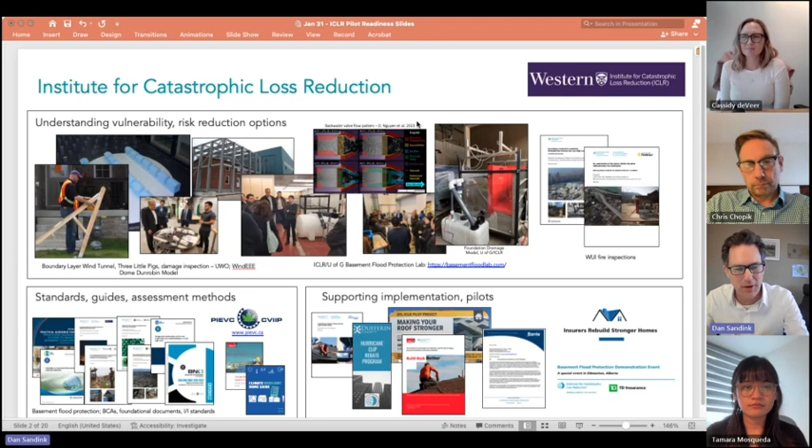So we are largely funded by the P&C insurance industry. What we found from our insurance membership, which represents about 90% of the market in Canada, is that when we have catastrophe events, the majority of losses tend to be accrued to property insurance—that's basically residential buildings, contents, living expenses, and so on. The remainder for the P&C industry is broken out into commercial and auto, but by and large, insurers have come to us with questions about reducing risk for residential properties. That's been their primary concern.

One issue is they tend not to be engineered, and of course older properties are more vulnerable in many ways. But what we see is typically 60% plus of catastrophe losses—when we see these big catastrophe events, 60% of those losses are to residential properties.

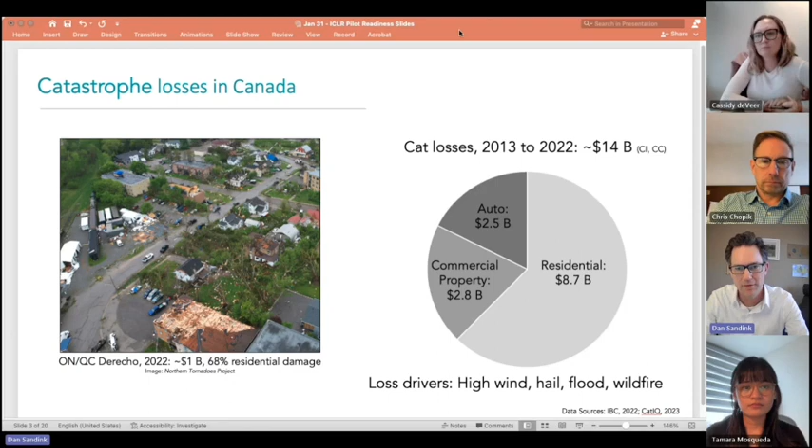So the rest of my presentation, I'm going to talk about what Frank Lohman has advised us to start a discussion with the building members of the task force, and that is on readiness for conducting pilots in these areas—generating some background information so that we can get to a state where we can conduct pilots and generate useful results from those pilots.

First thing I want to mention is that we're not starting from zero. There are many, largely municipalities in Canada, that have been implementing resilience. The first point here is that several municipalities have implemented incentive programs. We've worked with Dufferin County in Ontario, and also with the City of Calgary throughout 2020 to 2022 on an incentive program for roof cover, for impact-resistant roof cover.

For several decades now, there's been several dozen communities in Canada that have incented basement flood protection, generally oriented toward existing buildings, but the Dufferin and Calgary programs both included existing and new construction.

Some elements that we'll talk about with the task force over the coming months are already technically covered in codes, but because of different interpretations locally, they're not applied. One example is the NPC 2.4.6.4 wording for sewer backflow protection, relating to backwater valve installation for sewer related flooding. Some jurisdictions interpret this wording to require backwater valves, others don't. So we are applying these measures in some cases, just not universally across the country.

City of Barrie, we worked with them after the 2021 tornado to develop a set of code change requests for Ontario and national codes. Those are still working through the process, but it's another example of working with the building department to identify what we can do to reduce risk.

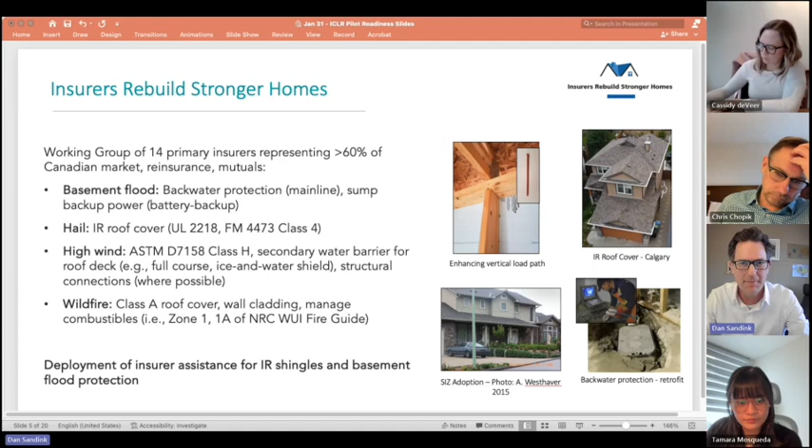Over the past couple of years, insurers have developed products or different approaches, largely focused on hail protection in the Calgary area and also basement flood protection across Canada. So that gives us some more practical work to draw on.

So which I'll go through. I know there's a lot of content here. I'll try to go through it relatively quickly. We can talk about it over the year. We can talk about anything here for like a whole day. It would be fun for me.

What we'll talk about right now is pilot readiness factors across our 4 key perils. For ICLR, the most important drivers of loss we've seen so far in Canada are hail, high winds, wildfire, and basement flood. We've worked on developing standards and guides with CSA, with Standards Council, with BNQ, with different groups across Canada on all of those topics.

We're at a different stage with respect to final technical recommendations across these different perils. I've got a set of factors here to help categorize which areas we could probably work on more quickly than others. First is, do we understand vulnerability of buildings? Second, do we understand the protection options available? Third, is the technical guidance mature? Are we working with standards that have gone through multiple iterations, or general guidelines issued by nonprofits? The more developed the standards, the more ready we are for implementation, we think.

Fourth factor is, what degree of risk is assumed by the builder to implement these measures? Some measures have been applied for many years in Canada, and are probably lower risk.

Some measures are a bit more novel and might present some risk to builders. The other question is, what can we do on the private property side, within the building footprint and within the homeowner's own property, to mitigate risk. Some measures for hail and wind relate entirely to the buildings. For flood and wildfire, there are considerations off the private property that have to be addressed for full resilience. We'll talk a bit about that as well.

The next consideration is maintenance requirements. Once you install those measures, do homeowners have to maintain them? And finally, hazard assessment: do we know where in Canada, where in communities, we should apply these measures? One last category is complexity and cost for installation. Is it going to be expensive? Do we have to train tradespeople to be able to install these measures?

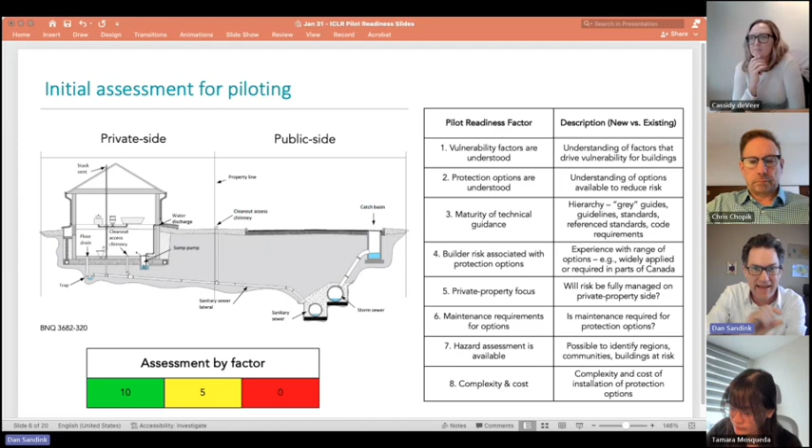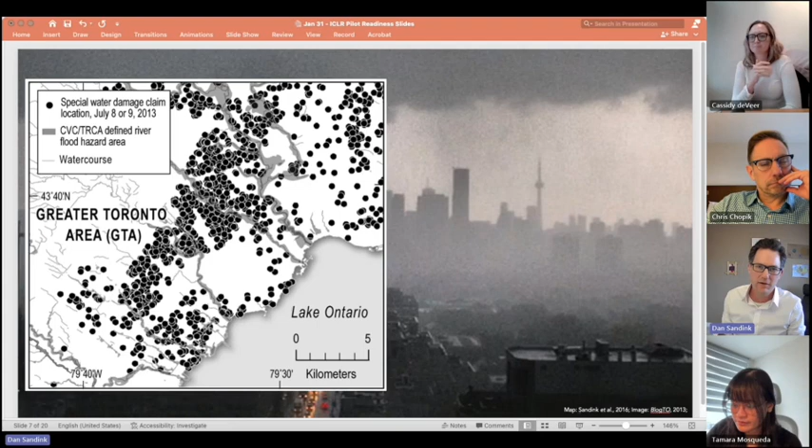First, urban flood. When we talk about flooding for ICLR, we tend to focus on urban pluvial flood. This is a kind of flooding that occurs off defined river floodplain areas, and it's also not coastal flooding. It's extreme rainfall that overwhelms storm sewer systems and sanitary sewer systems, causing flooding. Basically, anywhere the rain falls, buildings could potentially flood from pluvial flood.

So what do we do to mitigate risk? Generally, we apply drainage factors and backwater protection. We apply good practices for foundation drainage systems and sump pump systems. This is all outlined in several new standards that we're involved in developing. Most of these practices are fairly well applied for new construction.

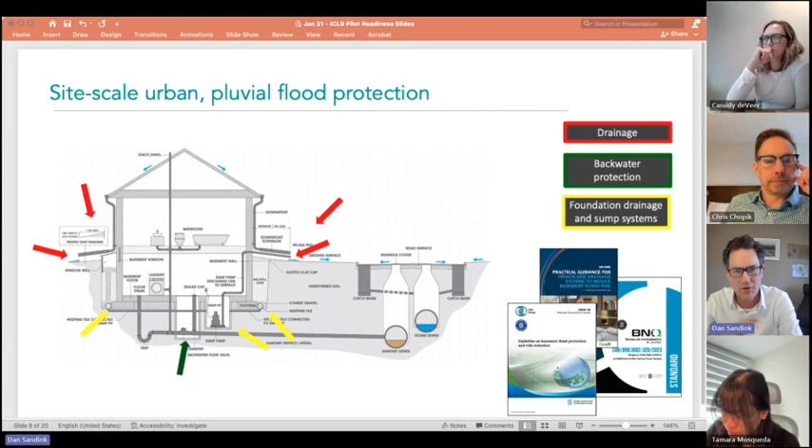For example, I'm sure you're doing good lot grading practices. Most municipalities have lot grading and drainage bylaws that would apply, but there's still a bit more we can do to protect new homes, and a lot we can do to protect existing homes. Going through my criteria, I won't detail everything, but generally we think we're in pretty good shape to conduct pilots in this area.

One reason is that most of the measures are fairly well developed and applied across Canada. As I mentioned, we're talking about lot grading and drainage, sewer backflow protection, and backup power for sump pumps. Although the standards are relatively new — there are new standards we worked on, like CSA Z800 — most urban municipalities have been dealing with this problem for many years and have issued their own guidelines on this topic. So we think we're pretty mature with respect to the technical guidelines.

I think the biggest concern for basement flood, for somebody working on a specific home, is that you can do so much on the private property side, but there are still municipal-side factors that need to be considered for full resilience. The other thing is that for existing construction, it can get pretty complex — you're dealing with digging up floors, regrading lots, and so on. These are the drawbacks to basement flood protection. But by and large, we've got many examples where we've done this already in Canada.

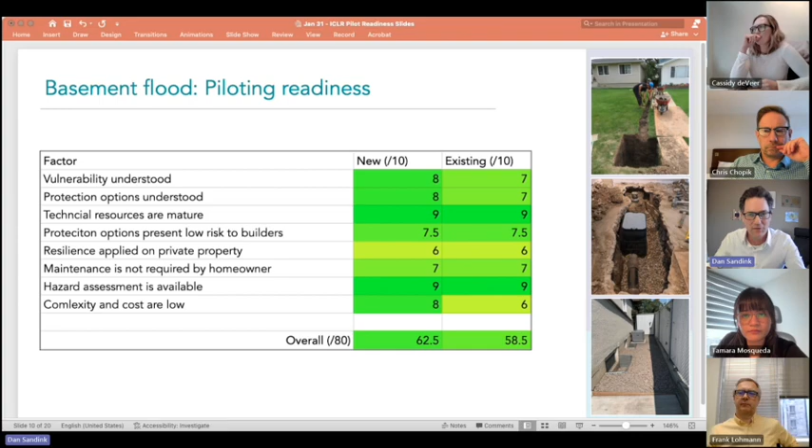Next, wildfires. I'm sure you're familiar with the issues around wildfire. Really quickly, one of the things we've done at ICLR over the past few years is post-fire community inspections.

We worked with researchers on assessing ignitions in Lytton after the fire in 2021. That report is published, but one of their main recommendations was that the fire moved through the community extremely quickly, fast enough that structural firefighting wouldn't really have made much difference. So we need to apply passive measures on properties within communities to reduce risk.

I'm sure you're familiar, but I'd say we could categorize these protection measures for properties into two categories: building measures and fuel management. Building measures essentially mean selection of cladding materials, roof cover, etc. that's not vulnerable to ignition. Fuel management means making sure fire isn't approaching the building, that we're not storing debris or having juniper bushes that could ignite from embers and so on.

This is something that's been going on in BC for many years, and many communities have DPA arrangements for this type of protection, but it's not widely applied in Canada.

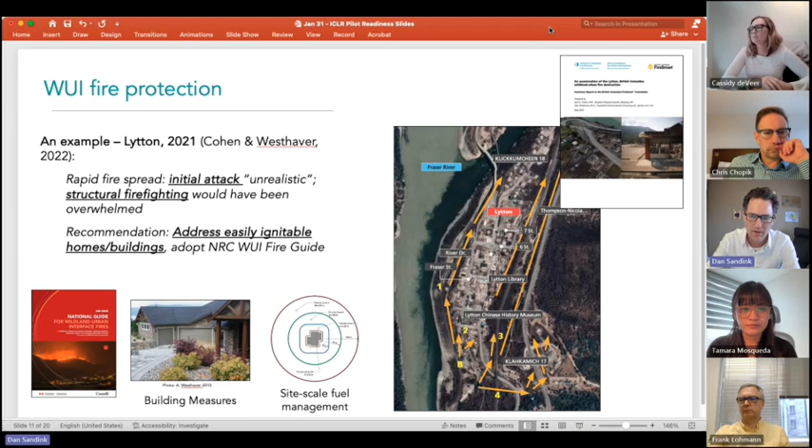For example, roof construction and roof cover really drive vulnerability of buildings. The structure ignition zone is also a very important factor driving vulnerability. Decks and windows are also very important. All of these elements matter, but some drive more vulnerability than others.

So from a pilot perspective, if we're looking to apply readily accessible, low-cost measures, our argument is that we could focus on some of these key areas first, and then move on to other elements as money and interest become available.

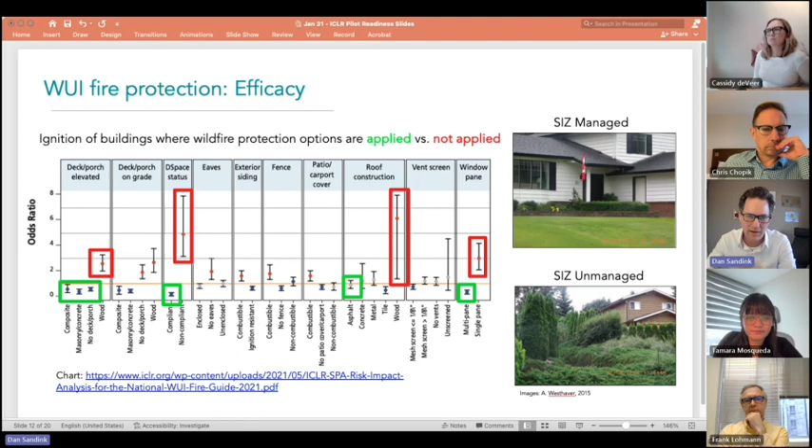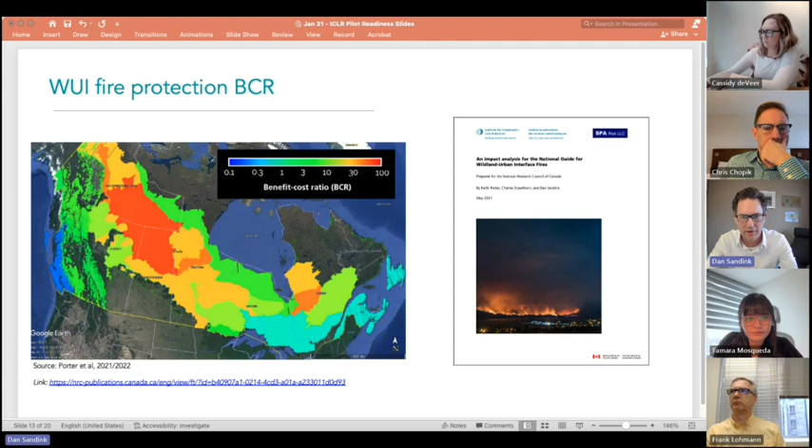Also for wildfire, ICLR conducted a benefit-cost assessment a few years ago for the NRC wildfire guide. This gives us a good indication of where in Canada we'd see a return on investment for fire protection. So relative to other hazards, we're fairly well set up to identify at least the general areas in Canada that would benefit from applying wildfire protection.

Just a footnote, Cassidy, understanding that's a dynamic situation. With respect to readiness for piloting, wildfire is a bit trickier than other hazards because there's a community-level consideration. Structure ignition zones extend beyond properties, and fire suppression has a role when fire is actually coming through an area. But we can still make a difference on the property side.

The major concerns are that maintenance is required by homeowners, so we have to engage homeowners and communities on ongoing maintenance programs, and sometimes you have to get communities together to manage structure ignition zones. Other areas we're okay, though not as well set up as for other hazards. Ignition vulnerability of buildings is still an area of active research, but we can learn a lot from pilots at this stage.

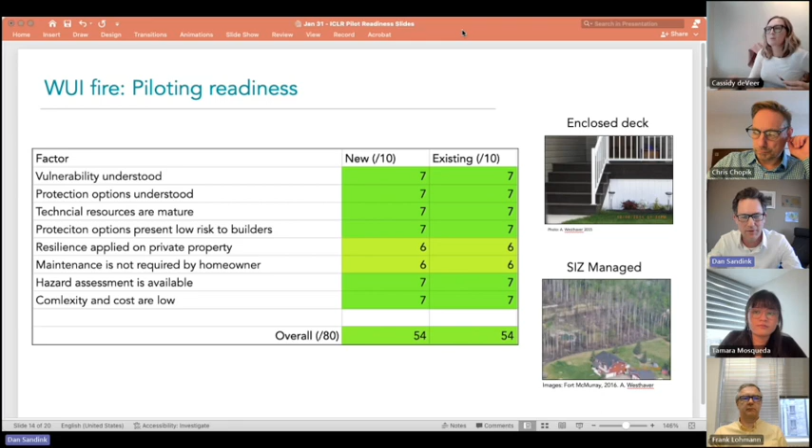Moving on quickly to high wind, I'm going to cover high wind and then hail very quickly, and then wrap it up with the overall summary.

For high wind, we've had a long-running program in Canada, including the work with Western University. We're one of the best countries in the world when it comes to understanding vulnerability of low-rise buildings to high wind impacts. So we can likely make good recommendations and good pilot applications of measures that address the key drivers of risk in Canada.

What you see in the news, or from many commentators, is buildings completely destroyed by tornadoes, hurricanes, and so on. But when you actually look at damage that occurs during high wind events, most of it is actually relatively minor damage—roof cover loss, fascia, siding, downspouts, etc. That's because the wind field has different speeds throughout; right up close to the tornado itself, wind speeds are high.

That's where you get those total devastating damages to buildings. But most buildings are affected by the periphery of the tornado track, and that means roof cover and related damages. So we know how to prevent those or how to reduce risk to those types of damage. It's not terribly technically complex.

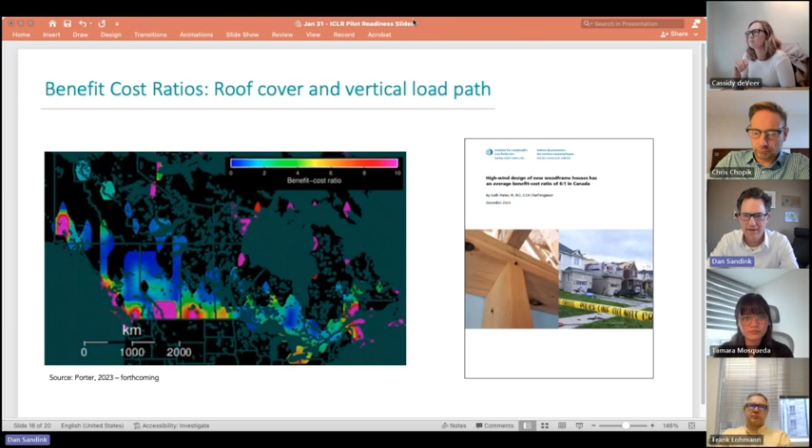We also have a benefit cost assessment for high wind protection. Largely, southern parts of Canada would benefit from application of these measures. We're happy to go into detail about that anytime with the task force.

So the overall readiness across most of the categories, we're in really good shape. We have good understanding of vulnerability, good understanding of what we can do to reduce vulnerability. We have standards. The standards are relatively new, but they're available right now. They haven't gone through multiple iterations. That would be the only caveat.

Protection options, they're all passive. We're talking about more connections, selecting different roof cover, 6 nails instead of 4 for shingles, etc. So not anything that requires maintenance or that would potentially result in significant risk to a builder from our perspective anyway. Hazard assessment is largely available.

The one area that might make piloting difficult for existing construction is the structural connections and the structural resistance to high wind, which is very difficult in existing construction, but pretty straightforward in new construction.

And then finally, hail. Hail largely affects, in terms of damages, southern Alberta. We also have a benefit cost assessment conducted for hail impact resistant roof cover. This is UL 2218 class 4 impact resistant roof cover. The additional cost maybe $2,000 to $2,500 per home in the Calgary area, but it would pay for itself in about 5 years due to reduced annual damages.

We know that most of the damage in hail events is caused to roofs as opposed to other building components. Very severe events can damage siding and so on, but most damage is caused to roofs. And then we know also that there is impact-resistant roof cover available on the market. Most of the major suppliers have it on hand, especially in Calgary now.

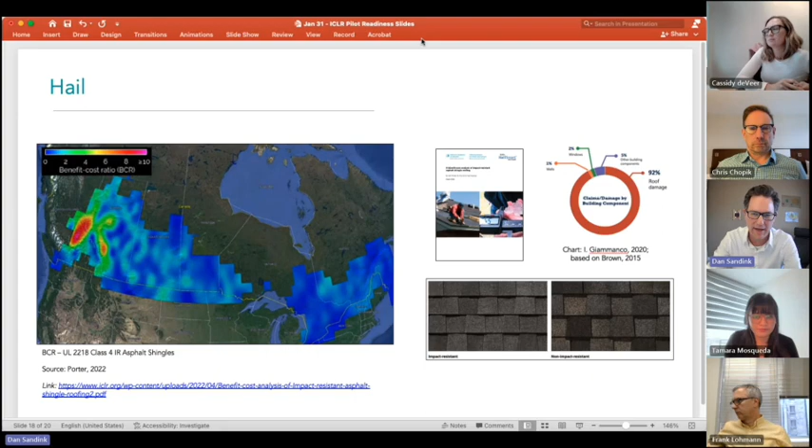So we're thinking this is kind of an ideal candidate for pilots. It's fairly straightforward. The roof cover installation is really no different than standard non-compliant shingles. There's been wide application in Calgary. The rebate program funded installation of impact-resistant shingles in about 1,600 homes across the city, new and existing homes. So we think a pretty good candidate for piloting.

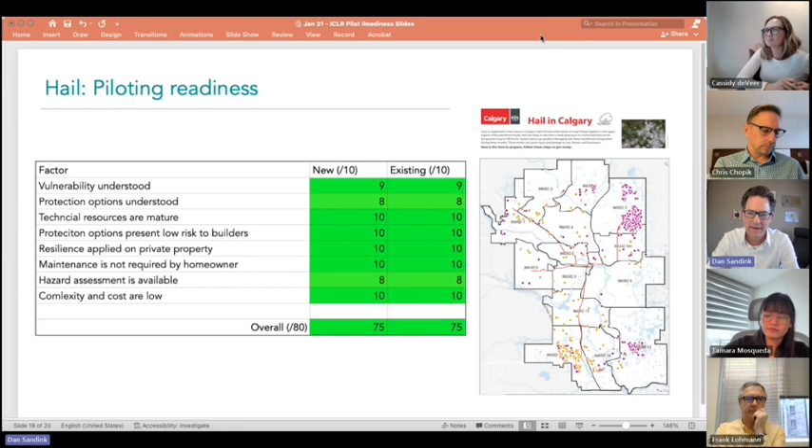And then just an overall summary. Again, we're trying to get up to the number 80. 80 is like the perfect candidate for piloting. Some of our areas are less ideal than others, but we think we can probably make some progress in all of these areas. But notably, high wind and hail seem to be most straightforward.

We've got good standards, we've got good guidelines, we've got piloting in place, and also we can make most of the difference at the property side, so in the building itself, and that's a bit different than basement flood and wildland fire. We have some materials prepared here for the task force when they're interested, when they're ready to think about piloting, that provides information on costing and impact of the different measures.

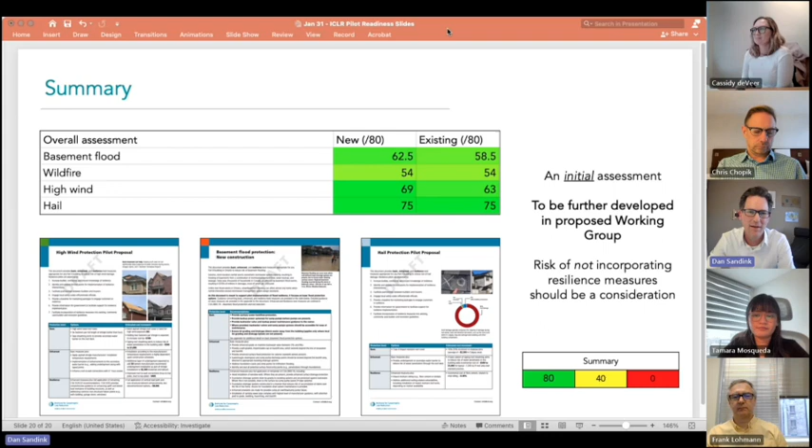And just to conclude here, this is an initial assessment, we want to work with the task force to refine this information. We're proposing developing a working group to pursue the pilot information. There are additional factors that we could incorporate into our assessment, like the risk of not incorporating measures, like what's the risk to homeowners in Calgary if they don't have impact-resistant roof cover. We haven't incorporated that at this stage, but we want to talk to the task force members about these topics. So I'll end it there.